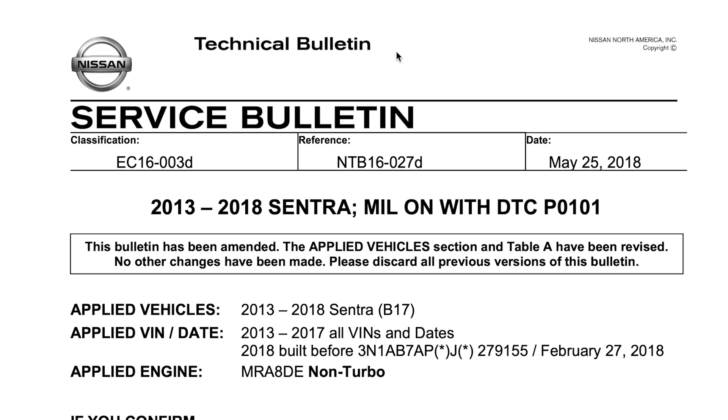Be aware that these platforms will have their own technical service bulletin related to DTC P0101. There is an important technical service bulletin related to these platforms, which may require a reprogramming event of the ECM, or electronic control module, in charge of engine operation.

And if you happen to be a DIYer, then stay tuned as I'll provide a few tips you'll want to use when contacting a service shop to help you solve this issue.

Hi, it's Scott Brown with a Motor Age Tech Tip covering the Mass Airflow Sensor Diagnostic Trouble Code P0101, made possible by Hitachi Astemo.

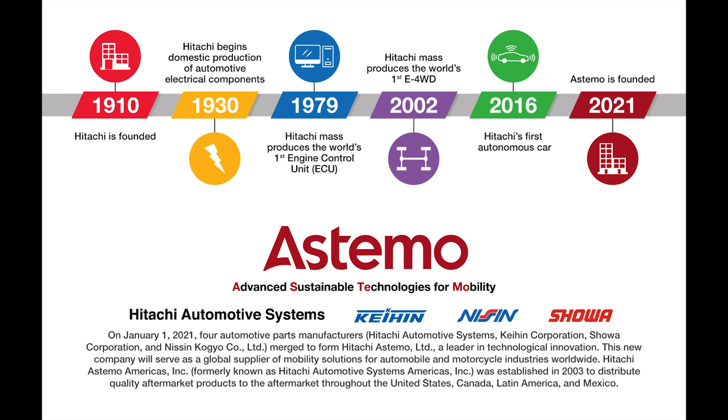Recently, Hitachi Astemo Engineering reached out and asked about doing an educational video on this topic. When we connected for our first meeting, we discovered that this DTC is misunderstood by most, which results in misdiagnosis, wasted time, and expense. We agreed to pool resources and assemble several tips a technician can use to gain a deeper understanding about this fault, its causes, and how to successfully repair the condition.

What does this code actually mean? Essentially, the code indicates that the ECM has witnessed a mass airflow sensor signal value outside of an expected range within certain engine operating conditions. The official description is mass airflow sensor signal circuit range performance.

According to service information, either of the following conditions could be true, which would result in this DTC being set: high voltage from the sensor is sent to the ECM under light load driving conditions, or a low voltage signal from the sensor is sent to the ECM under heavy load driving conditions.

So when presented with this situation, it would be wise to collect the freeze frame information so that you know which operational condition the engine was in when this fault was set.

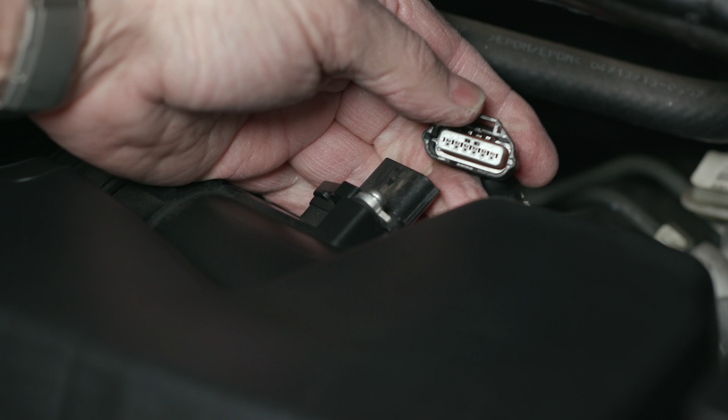Next, we need to be aware of how this signal can be affected, which are as follows. Electrical interference: a physical inspection of the connections and wiring should be performed, along with checking the proper power and ground supply circuits, making sure you're loading them accordingly. Then check the integrity of both the male and female electrical terminals, and make sure that they're clean and tight.

Airflow disturbance: airflow leaks due to a damaged boot could cause DTC P0101. And if this is something that you discover, you'll also want to make sure that the engine mounts are operating properly. Otherwise, you could have a repeat failure.

Vacuum leaks can also cause this, which may warrant a leak check using your favorite method. Airflow disturbances before the sensor shouldn't be overlooked either. The air box and filter should be analyzed closely, as well as looking for anything that might disturb the normal laminar airflow. Additionally, since engines today are equipped with variable valve timing, electronic throttle, and other sophisticated engine controls, there are diagnostic algorithms running with compute cycles being carried out tens of thousands of times a minute.

Some of these algorithms may have been calibrated for known conditions when the vehicle was new, but as things change, such as carbon buildup, engine wear, etc., the calibration limits may be exceeded and trigger a fault even when there isn't an actual component or sensor fault.

Now, if you're addressing a vehicle with only a MIL, aka check engine light, and no reported drivability complaints, then you will absolutely need to check for service bulletins. And frankly, I think we should all be referencing service bulletins in general.

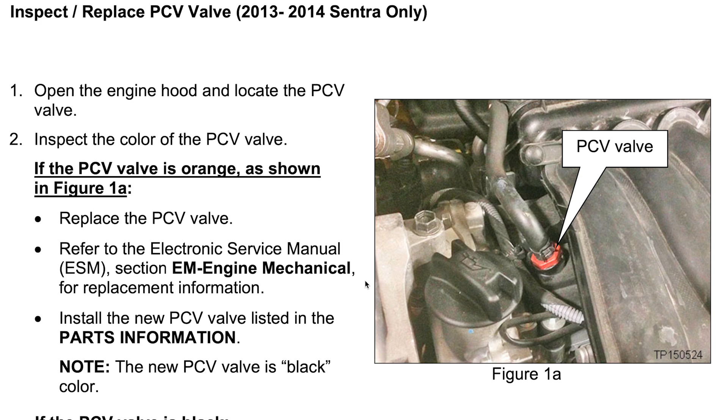On some Nissans, this is especially important because Technical Service Bulletin NTB 16-027D outlines several critical issues. The first line within the action area of this TSB states, for 2013 and 2014 models, check for an orange ring on the PCV, or positive crankcase ventilation valve. If it exists, replace it with a new one.

Now let's think about this for a second. The PCV is a calibrated vacuum leak into the crankcase, and it's possible that the current flow rate on this valve is taking the total airflow measurement outside of a standard value.

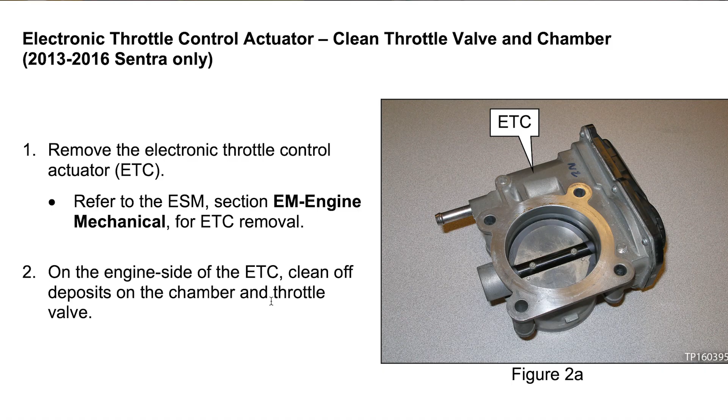Now the service bulletin doesn't stop there. The next step involves cleaning of the throttle body, which in my opinion is something that should be carried out more regularly in regular service intervals. If we think about this for a minute, as carbon builds up on the throttle plate, what does this do to airflow at idle? Well, it restricts it, right?

This also slows the engine down, which then requires the ECM to increase throttle opening in order to compensate. And as mentioned earlier, we have variable valve timing on engines today, and this is one of the reasons proper maintenance services need to be carried out at their proper intervals. From there, you'll need to properly perform an idle relearn procedure, which we'll cover later.

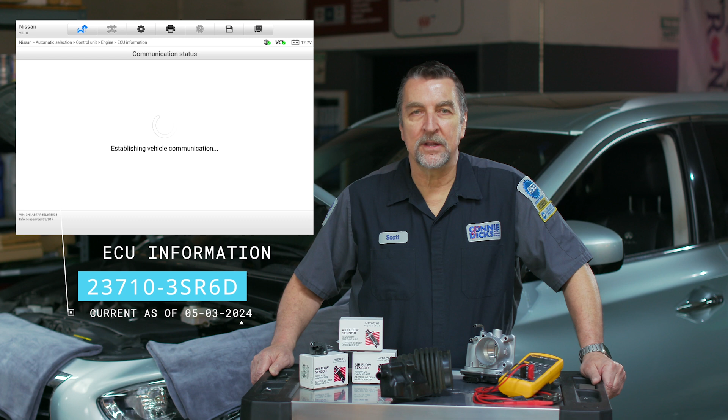Additionally, this DTC may ultimately be resolved by installing a new calibration due to what we discussed earlier. The bulletin states to read out the current calibration numbers and compare them to the list on the website. If the vehicle is subject to the update, then this is something that will need to be performed to properly repair this vehicle. Programming is something you're likely able to complete with the tools you already have.

A compliant J2534 interface and a computer meeting the manufacturer's specifications is primarily all that you'll need. The process is involved, and although we don't have time to walk through all of the details, you can refer to the links included in the description for more details. In the future, we may plan to assemble a complete end-to-end programming session so you can see and learn how it's done. Now, if you're a DIYer faced with this situation, then here are a few things you should arm yourself with before contacting a service shop outside of the dealer.

When you make contact with the shop, explain your situation and advise them that you believe your vehicle may need an ECM calibration update, and ask them if they have the ability to perform all the steps outlined in the applicable technical service bulletin.

Now, whenever possible, I like to grab my scan tool and record specific data parameters on my road test. I usually do this before and after any repairs. I like to observe my before and after data so that I can ensure a proper repair and then document this on the repair order.

Clients may also be interested in knowing more about what it took to properly repair their vehicle, which in my opinion adds value. The data PIDs I typically record for most drivability related complaints are as follows: engine RPM, engine coolant temperature, mass airflow in grams per second, absolute load, commanded equivalence ratio or lambda, actual equivalence ratio or lambda, short-term fuel trim, long-term fuel trim, throttle position sensor and angular percentage, and battery voltage.

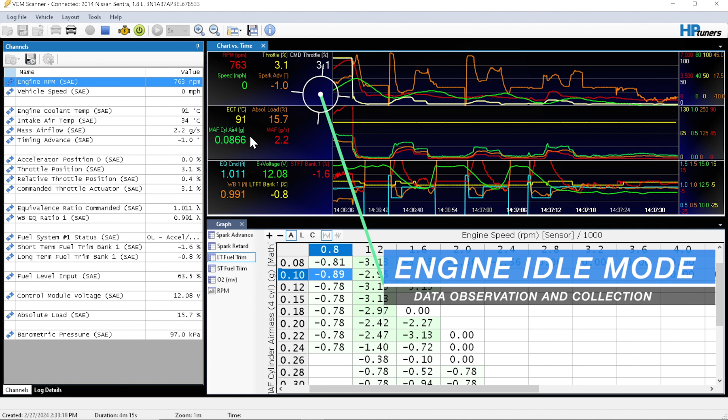So what this means is that we'll need to conduct part of our road test, recording data while safely carrying out wide open throttle conditions passing through that RPM range. One can usually safely accomplish this by accelerating onto the freeway or in a similar manner. Once we do that, we'll return to the shop and place the gear selector in park, turn off all the loads, and let the engine idle for a brief period, just before stopping our recording.

Okay, now let's road test the vehicle and see what we got. And as mentioned earlier, this is a CVT transmission, so it's going to be a little hard to get that engine speed. So we're going to try this from a lower speed, and then we're going to go wide open. Got some data there.

All right, so we will stop our recording and we're going to zoom out a little bit. There's our wide open throttle segment there. We're going to go ahead and just zoom in on that.

All right, so 3,600 RPM. You can see I'm wide open throttle there, and we go right up to about 3,600 RPM. And you see we have absolute load of 86.3. Our cylinder air is 0.46. But it looks like 87, 88, 89, 90 up here. 90% volumetric efficient.

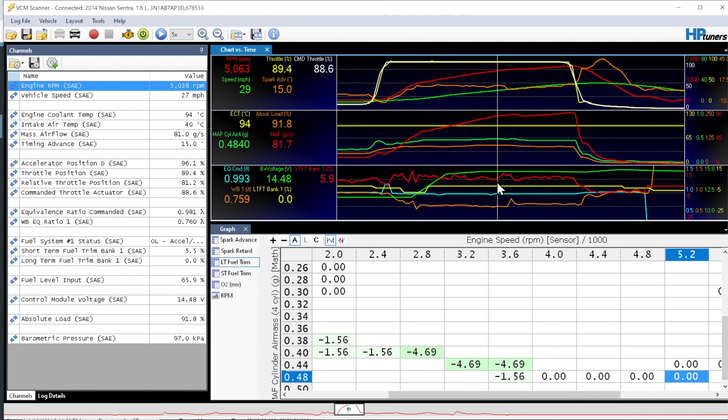The other thing to note here is that our equivalence command is 0.978, so that's just a little bit richer than stoichiometric, right? A few percentage points. But look at what our measurement is. It's actually 0.755. That's really rich. So it's very possible that we could be over reporting airflow here.

And of course, in wide open throttle, we don't have any long-term correction being applied. I don't know how much fuel trim learning or what actually takes place up in this region here, but it looks like we've got some short-term, and it's actually adding fuel. So it's a little puzzling as to why we're richer than what's being commanded.

You can see we're over here, we're at lambda 1. And you see our trims are good, 3.9%.

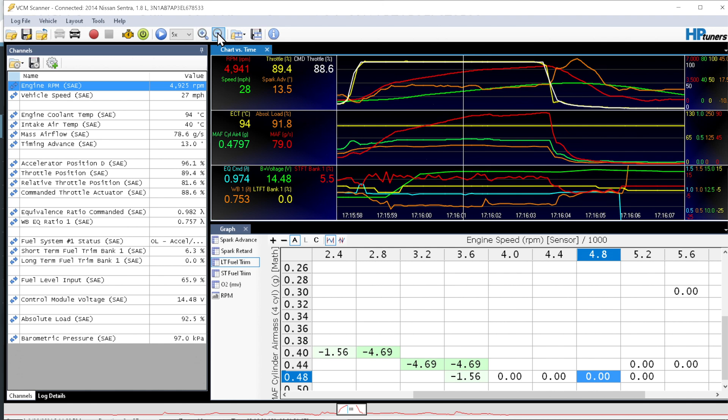We'll zoom out a little bit here. So as we're cruising around over here, you see our absolute load, 50%. Short-term and long-term fuel trim, not a whole lot changing there, and we've got really good lambda numbers.

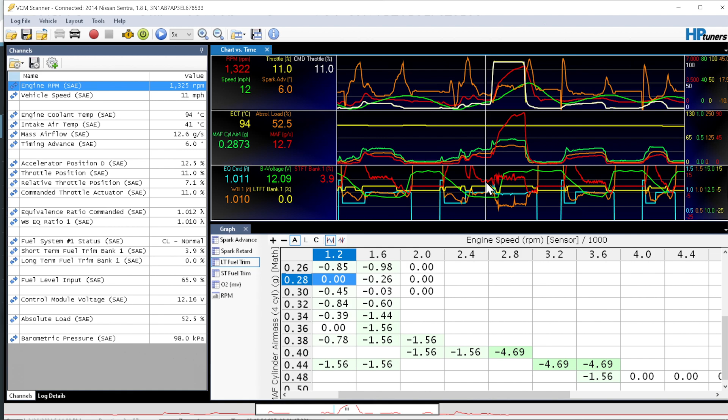Now, with our known engine size of 1798 cc's, we'll need to find the air mass of a single cylinder.

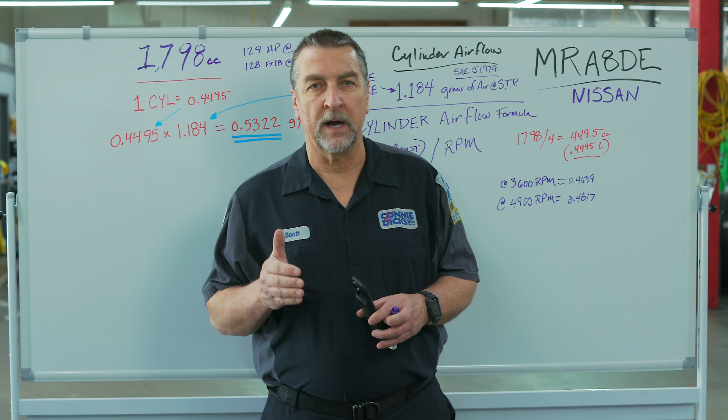All right, now that we're back from our road test, we need to find our cylinder air, but we need to have our reference baseline. So what we need to know is that we've got 1798 cc's. We need to find the volume of one cylinder, or how much air mass fits in one cylinder. So we can basically take this 1798 and divide it by 4, and that basically gives us 0.4495.

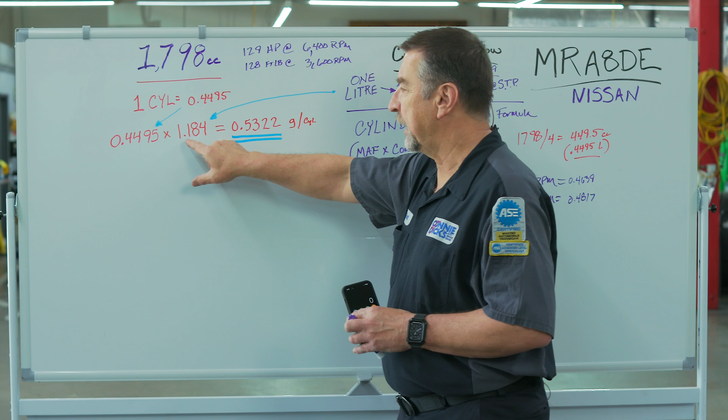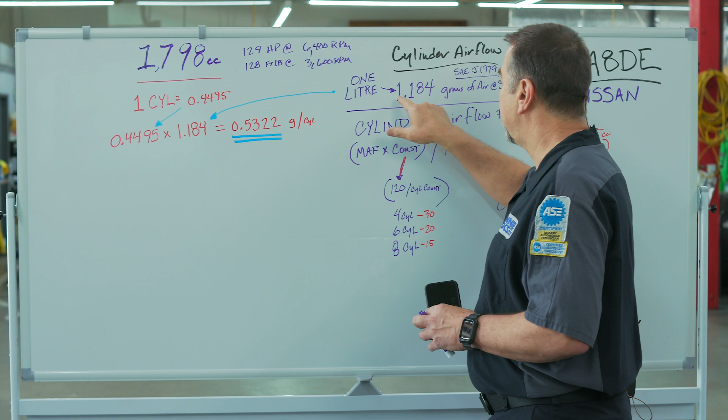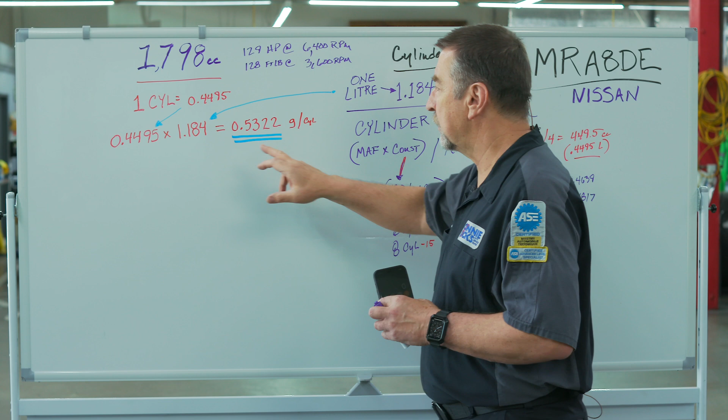So we take 0.4495 times a constant here. And so if we look up the SAE J1979 standards for absolute load, we will find that 1.184 grams of air at standard temperature and pressure will fill a 1 liter volume, right? So what we do is we take this 0.4495 times 1.184, and that gives us 0.5322 grams for a single cylinder. So if we're road testing our car and we're able to hit that 0.5322, then we've got 100% volumetric efficiency.

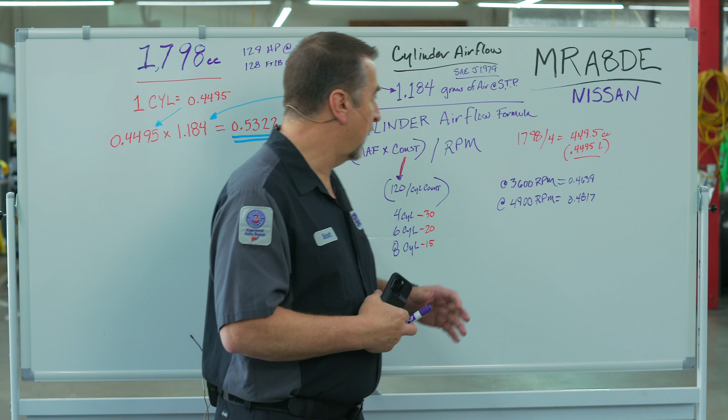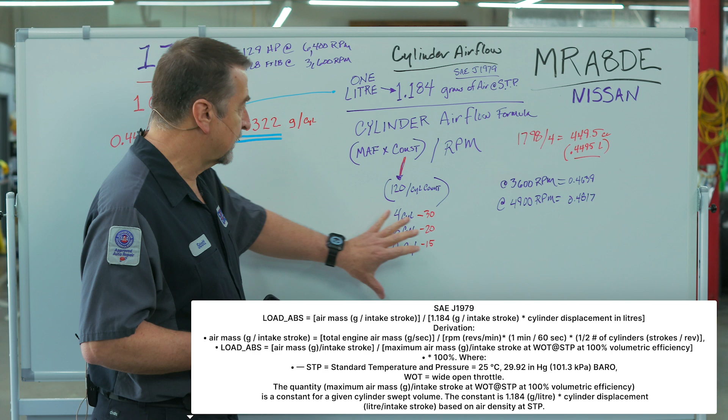Now, the other issue or challenge here, of course, is how do we find that value? How do we find cylinder air when our scan tool is giving us mass airflow in grams per second? So the formula for that is fairly simple here. If you look it up in SAE J1979, it's very complex, very long and intimidating.

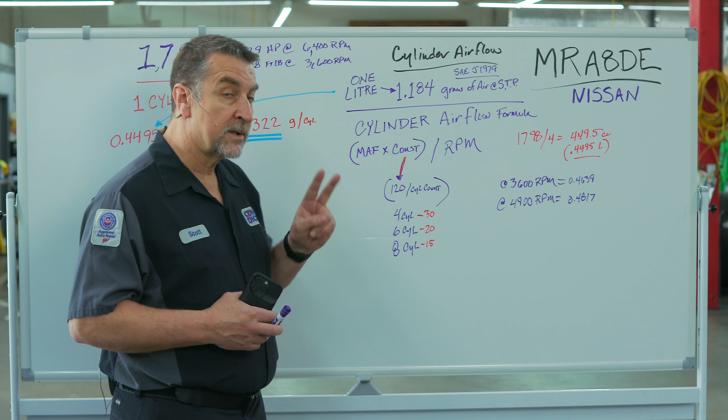But a quick and dirty way to find this value is that you take the mass airflow, it has to be in grams per second, okay? And you multiply that times a constant. And that constant is going to help us normalize against this. This is in grams per second, and we need to figure out, we need to divide it by RPM. So we're going to need to normalize this. And the way you do that is that you take 120, which would be 60 seconds, 2 revs of the crankshaft, all right? Because we're, again, trying to normalize against RPM per minute, and we've got seconds.

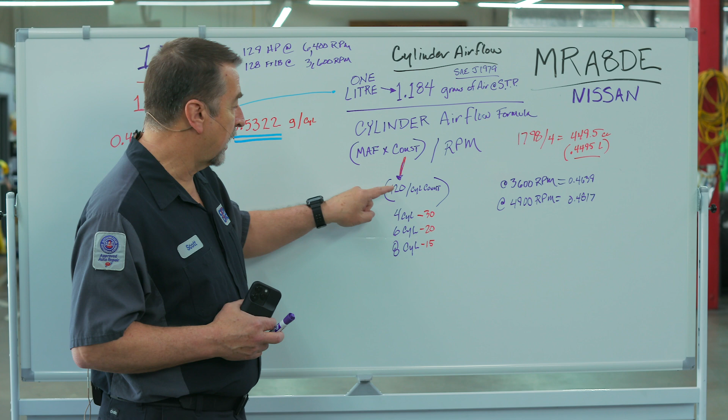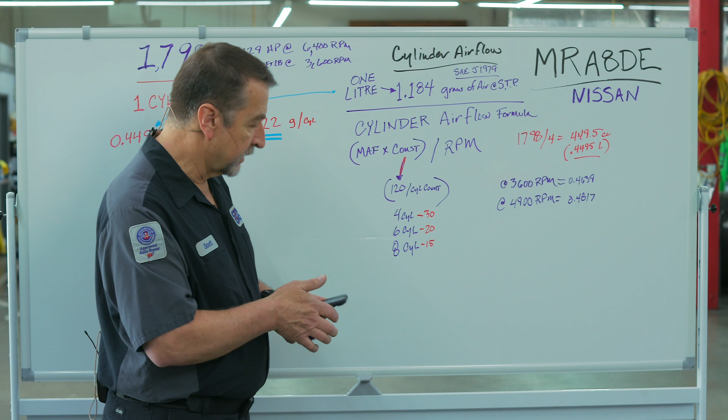So we take 120 divided by the cylinder count, and here we have 4-cylinder is a value of 30. But you can take any of these values for the engine of your choice or you're under test, and it's going to work out just fine. All right, so what we will do is we will take what we measured in our scan tool, okay?

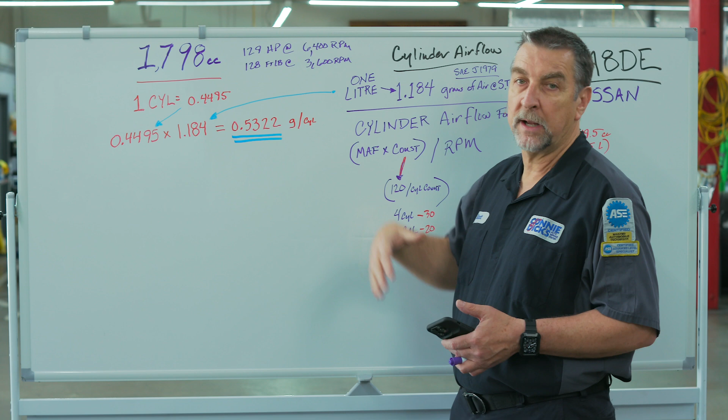And we go to 3,600 RPM. Why do we pick 3,600 RPM? We need to sample this at the engine's rated or peak torque rating, and when they give you a torque rating, it is at a specific RPM. On this engine, it is 3,600 RPM. We do not want to sample it up at 6,400 RPM or at a shift point. You want to go by the rated torque, because that is where the engine is making maximum efficiency, or has the maximum pumping efficiency. And that's your point of reference.

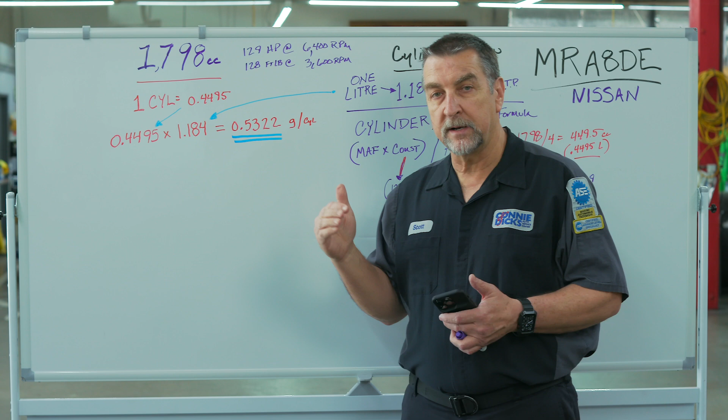And if you do any corrections to the vehicle, any repairs, and you want to rerun this volumetric efficiency test, you want to repeat it and sample the data at the same RPM.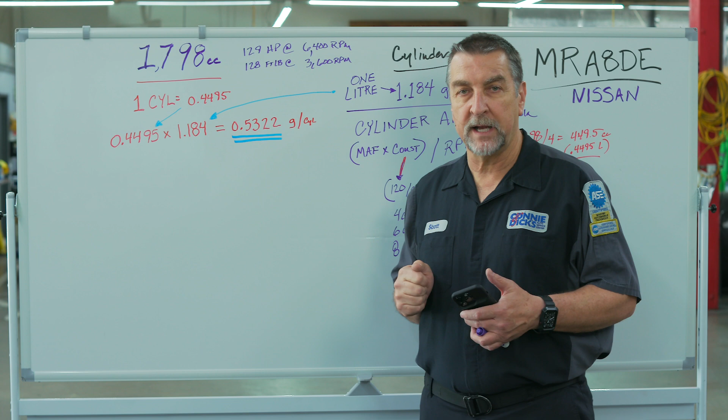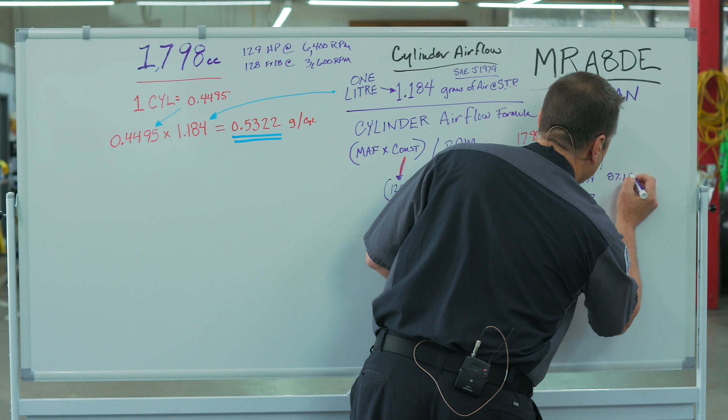So what we can do is take our 0.4639. Let's get our calculator out. We'll take 0.4639 and divide it by our constant of 0.5322, and that gives us 0.871, which is 87.1%. And we would call that our base volumetric efficiency.

Now, it's not absolutely perfect. There are plenty of volumetric efficiency calculators on the web. You can go out there and use them, but you do need other parameters. You need some temperature, you also need barometric pressure to find your value, but this will give you a quick and dirty number.

So we can also go up to 4,900 RPM and look at what our values are. So we go 0.4817 divided by 0.5322, and we have 90.5.

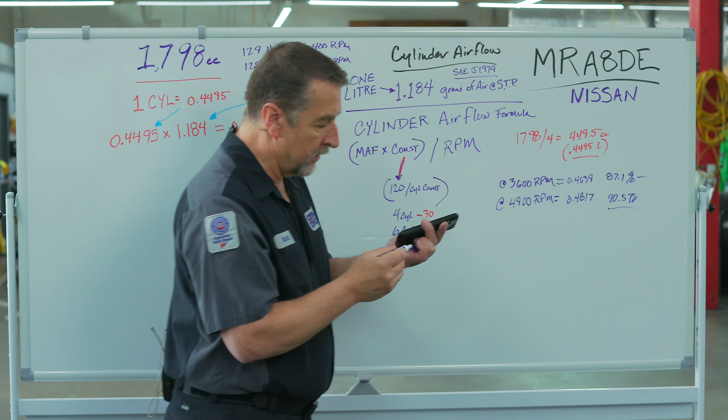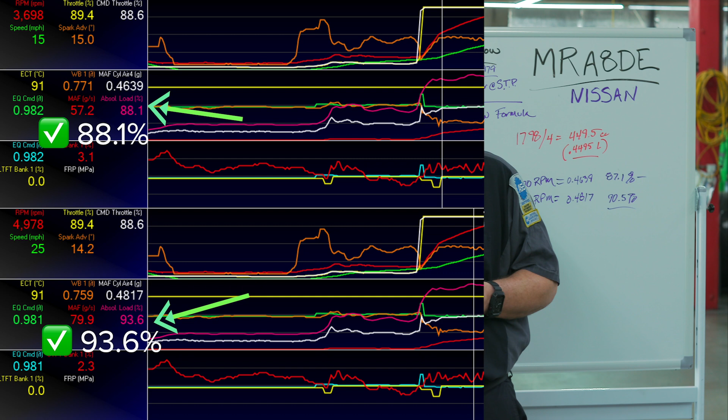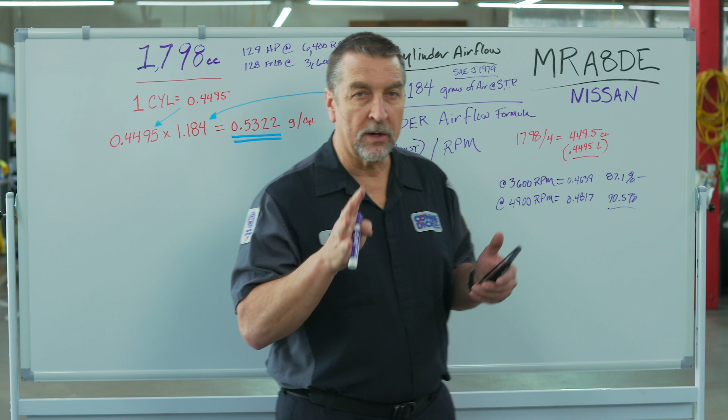So why would we have a higher number? Well, this engine does have variable cam timing, so it's very possible that it could have a wider volumetric efficiency range. It's also possible that this engine's mass airflow meter is actually over-reporting. And the reason I say that is if you look at our data from our road test, you can see that our lambda number is much richer than what's being commanded. That is very possible of being indicative of higher airflow being seen by the PCM. It's trying to add the corresponding amount of fuel, and it's actually overfueling because that number is high. Now, we didn't go out and test for this particular thing on this video, but that gives you some perspective.

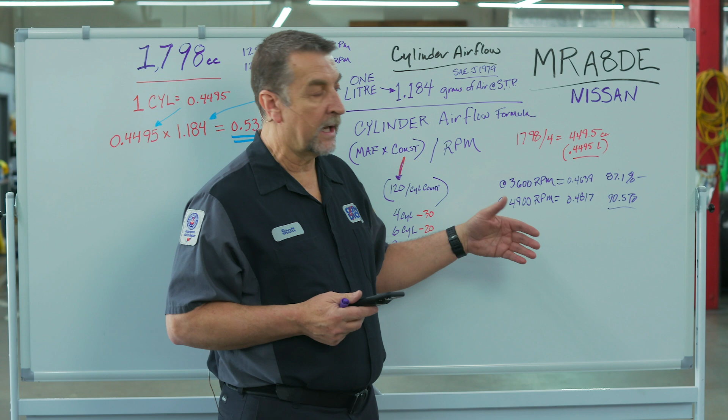But you can take these numbers and establish them as a baseline, and say that you're going to do a repair, then go back out and repeat your test at the same speeds and record your values.

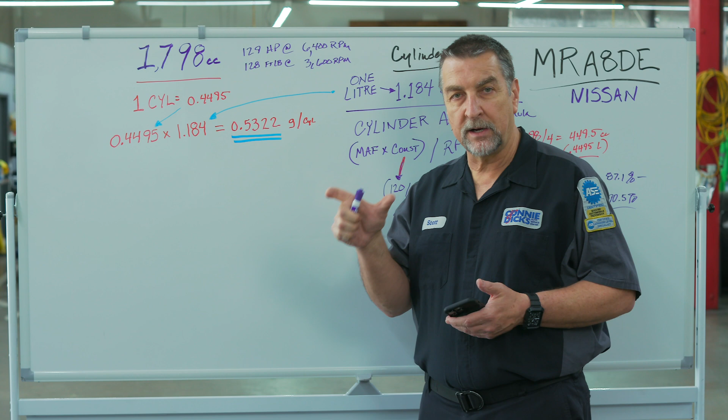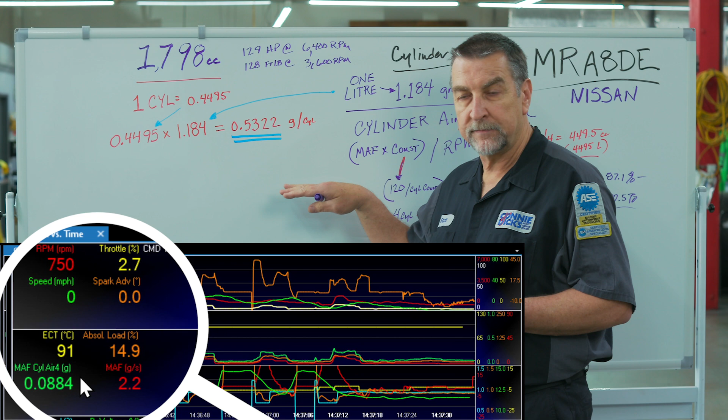The other thing that I noticed and find useful is also finding the cylinder air at idle. You saw that my scan tool actually calculates that value in real time. And if you carry that out over 4 digits, you can get a good idea of what is normal for your idle airflow calculation. Compare that to the throttle opening, and that could give you some indication that maybe the throttle body needs some type of service work as well.

Now, if we've issued corrections to the vehicle, including cleaning of the throttle body, we'll need to perform our next steps, which is performing the idle air volume relearn as per the service bulletin or service manual. As per the service bulletin, we need to ensure that the engine is at proper operating temperature. Using a capable scan tool, we'll enter the idle learn procedure and follow the prompts.

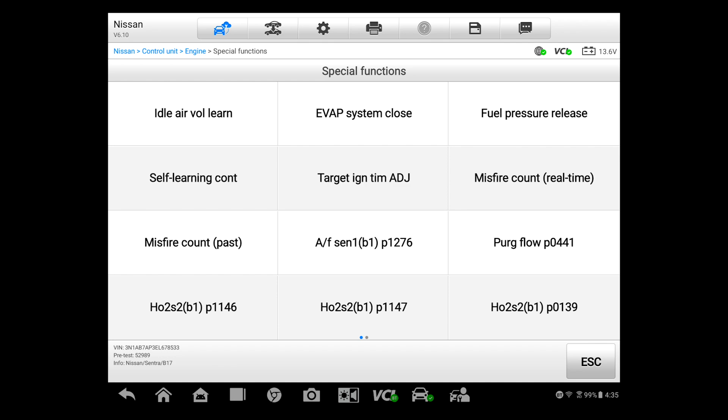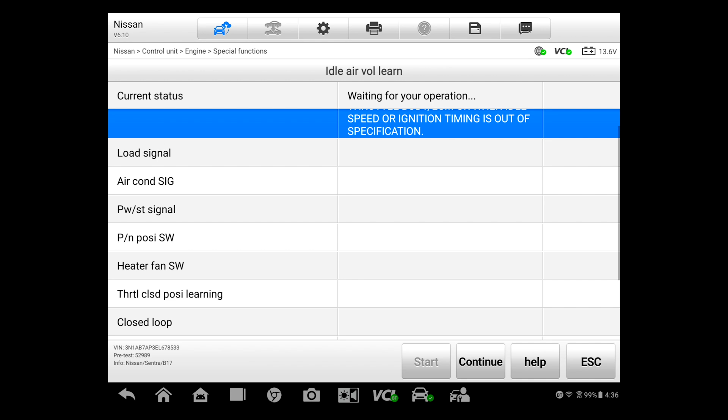This is where we would go to do the idle air volume relearn. The tool here provides us with a lot of information on what we need to do. This is where you need to run the car till we can get that coolant temperature between 70 to 100 C. Recommended to stay below 80 C, so that's interesting. Load off, okay, it's okay. And then this is where we would start. And see, it says waiting for your operation.

Now, we just covered quite a bit, and I hope you learned something along the way. Remember, accurate diagnosis can save time and helps in delivering competent service.